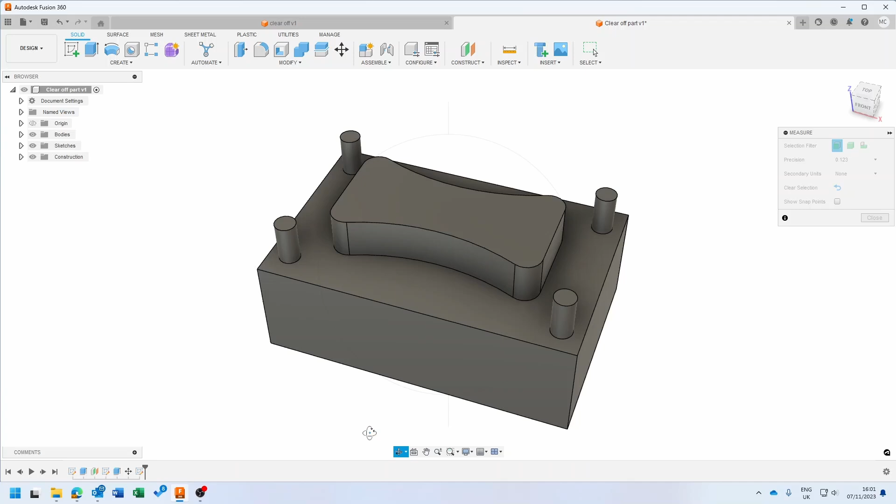So a question that we often get asked here at XYZ is, what is the benefit of Clear Off in the ProtoTRAK RMX? Well, if you had a part like we can see on the screen, there's a lot of material to be removed from this area, leaving the island standing up.

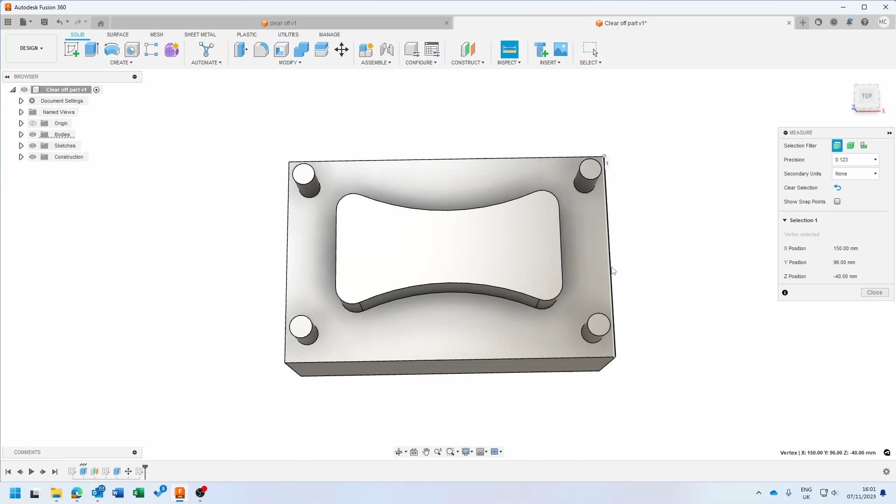Traditionally, some people would draw the outside of the billet as a pocket border and then define the islands in the middle. But if you're going to depths of, like we are, of 35mm, that's difficult for the swarf to get ejected out of that pocket, and you need a very high pressure coolant or a good air blast system.

But with the Clear Off, that problem gets negated because the control removes the material from the outside of the boundary, so therefore swarf can easily be evacuated, particularly when used together with the adaptive material removal strategy.

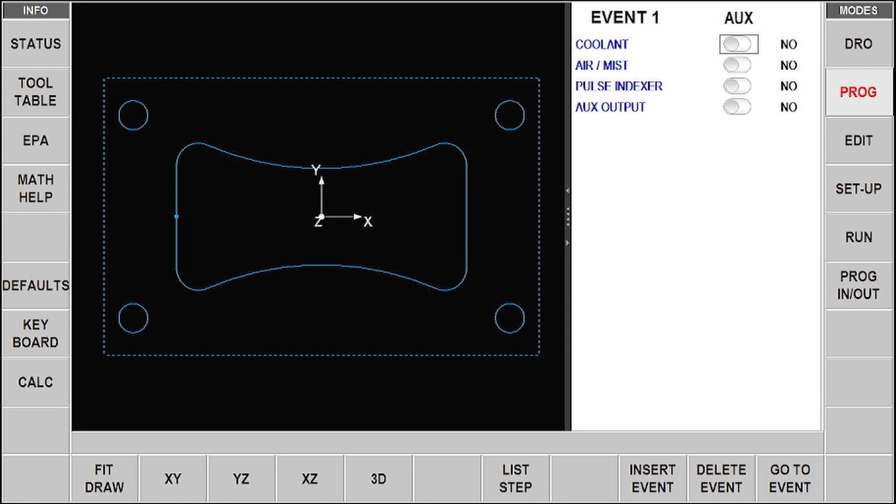So here, to program my Clear Off feature, the first thing that we can do is find the feature by going to your main machining menu, selecting the More capability to take you round the corner on the menu, and there you'll find Clear Off.

When you go into Clear Off, the first thing the control will ask you is to define the shapes of any islands that you've got in the area that you want to clear away. They can be circular, rectangular or irregular, benefiting from the use of the AGE profile.

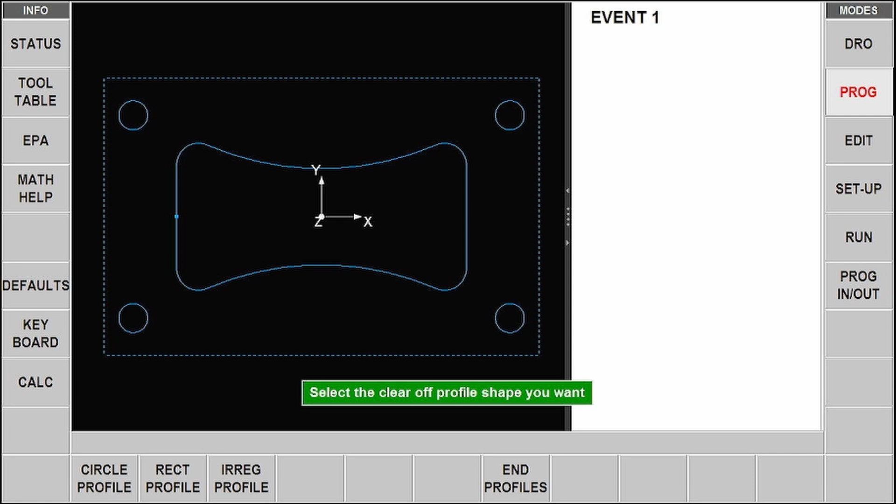Just remember, of course, if you have DXF or parasolid features on your RMX, that can also be used to define these shapes. Once we've defined any islands in the area, the control will then ask you to define the

shape of your billet, be it circular, rectangular or again irregular in form. In our example here, we're just defining a rectangular billet, where we've given the bottom left hand corner and top right hand corner, the depth that we wish to go to, surface speeds and the feed per tooth.

Now the control will calculate to first make the insertion outside of that rectangular billet and start the cut from that area. Once cutting has started, any further drop-ins in Z will be done in fresh air.

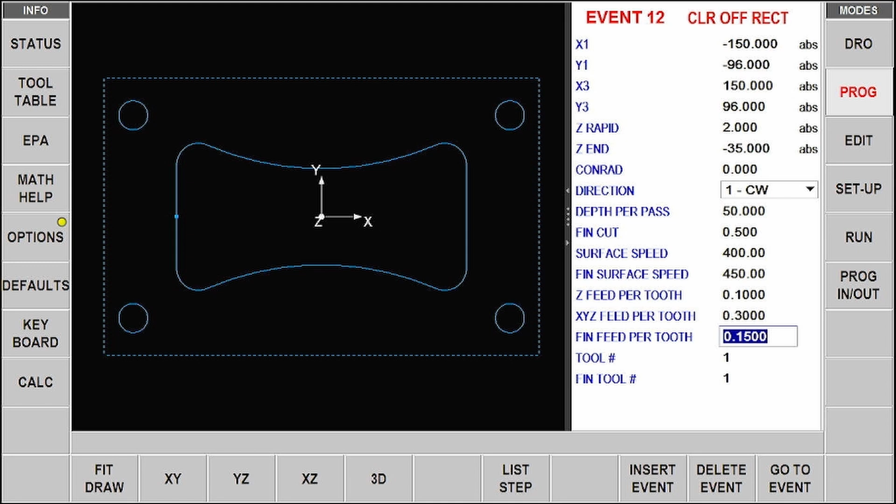That can of course be checked by using the toolpath feature, where by looking at different views you can see where the Zs drop in away from the workpiece and material.

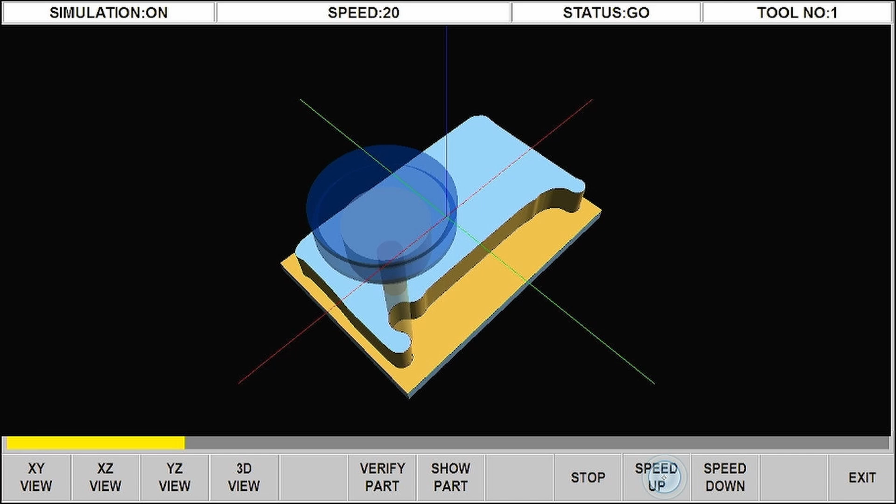And as the ultimate check, we can go into Verify Part, to get a solid 3D rendered view of the part you wish to machine.

So now let's machine the part on a TMC 750 and really see how that swarf gets thrown away from the part when you're machining using Clear Off.

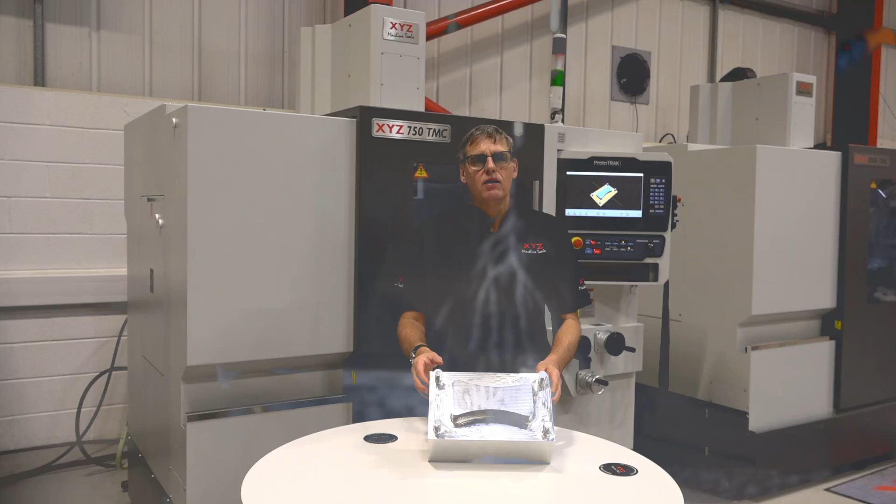We hope the footage there shows you the benefits of the clear off option on the ProtoTRAK RMX. The fact that you don't have to concern yourself with how the tool is going to penetrate the material with either plunge, zigzag or helical interpolation.

The fact that you're protecting your tool from damage by swarf because all of that material gets thrown away from the cutting area, it's not restricted by a pocket boundary.